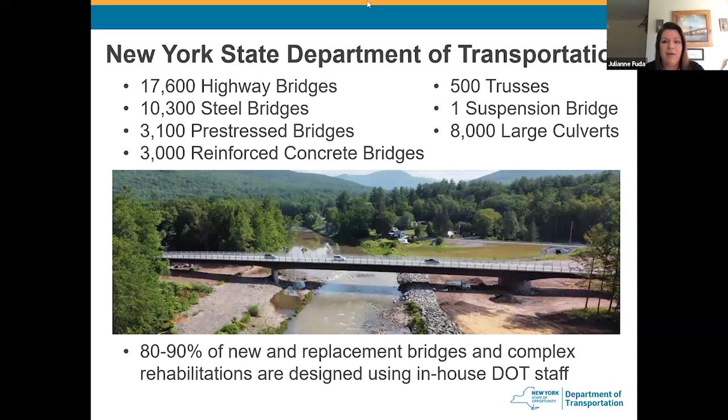One thing that does set us apart from maybe some other state DOTs across the country is that we do 80 to 90% of our new and replacement bridge projects or complex rehabilitations in-house using our own DOT staff. We don't rely on consultants a lot here in New York State, and that's something we pride ourselves in, being an expert owner. I'm happy to be here this afternoon to share that experience with you.

A little throwback to the history of New York State and BrDR. This is a screenshot. We started using AASHTOWare back in 1996. Back then, some more seasoned users may remember it called the Virtis Opus program, where Virtis was used for load rating and Opus for design. We've been heavily involved in using the software since 1996 all the way through currently.

A bit about how we use the software at DOT. BrDR, or AASHTOWare Bridge Rating and Design, is our primary design tool used in-house. It's actually mandated for all new and replacement bridge projects to have a BrDR model as one of the final deliverables at the end of design, whether the design is done in-house by my bureau, by a consultant, or by regional staff.

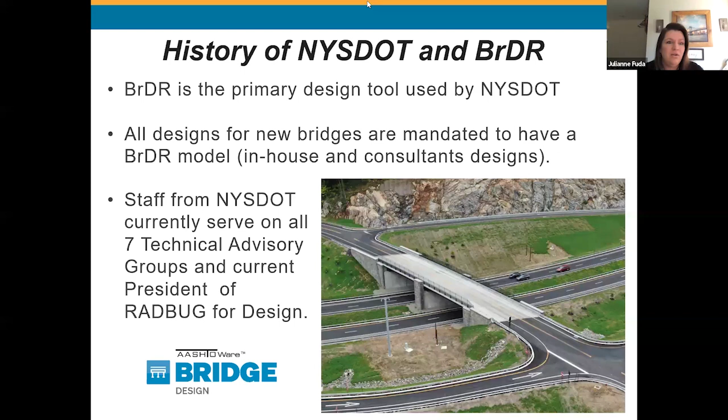Given our deep involvement with the software since the 90s, we have New York State DOT staff who serve on all 7 technical advisory groups, or TAGs. You'll hear me and Joe call them TAGs throughout this webinar. And as Joe mentioned, we are the current president of RADBUG, representing design.

A little bit about how we like to approach our design methodology in New York State. These are snippets from our DOT bridge manual, which is the design guidance we create for engineers across the state on how to approach design of new and replacement projects as well as complex rehabilitations.

From this section, you can see on your screen that it's our standard practice for structural analysis of straight beams or girders to utilize the line girder method. There are situations where a more refined analysis, such as 2D or 3D finite element, might be needed, but we only want that used when specific criteria listed in our bridge manual are met.

The reason is we want our designers using the simplest analysis appropriate for the structure type. So if you have a steel straight multi-girder bridge with low skew and no curvature, that lends itself very well to line girder analysis.

Even though we use line girder analysis in design, we also want it used for load ratings. We have another requirement in our bridge manual that if a more refined analysis isn't required for design, the load rating computation shall be performed using the line girder method, regardless of the methodology used for design. So why do we do that?

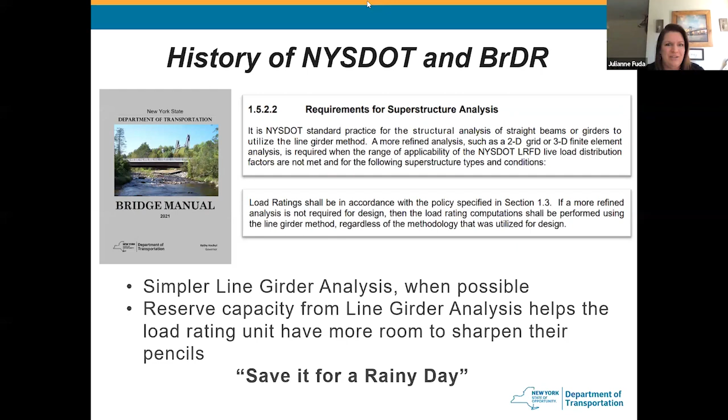The reason is there's reserve capacity inherent in the line girder analysis methodology, and we want to keep that reserve capacity so it can help with load rating and analysis of the structure throughout the rest of its service life. We want to save that extra capacity so we have room to sharpen our pencil down the road and, quote unquote, save it for a rainy day.

We also require that you must use the AASHTOWare BrDR software for design on all new and replacement bridge projects. This is another snapshot from our bridge manual showing how we want to use BRD, the bridge design portion of the software, for design, and BRR, the bridge rating portion, for all our load ratings.

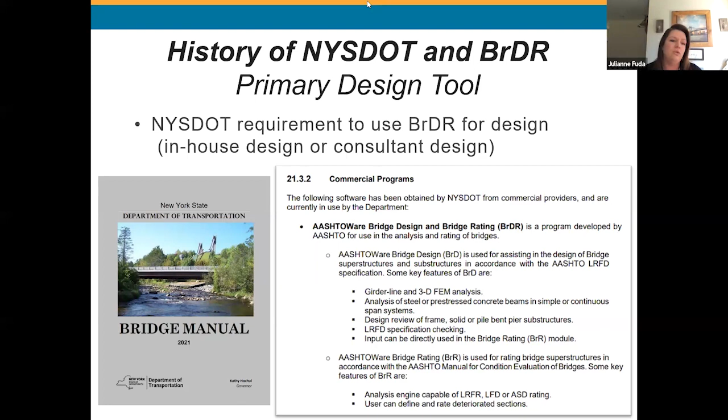And again, this is a requirement whether the designs are done in-house in my group or by the private industry and consultant design.

This is where we get together, we beta test the software. If we have enhancements, maintenance, or bug fixes, all of those are going to be tested thoroughly before it goes out into production. So it's a very valuable involvement.

The design tag as well as the analysis tag, so that's going to be any issues, questions that come up, maintenance items, enhancement ideas, anything relative to those specific topics will be addressed within that tag.

We're also involved in the backlog tag. AASHTOWare went through a major modernization in previous versions, and we kind of had to put some things on hold to make sure that we could get through the modernization before tackling new enhancements or new requests. So the backlog tag has been formed to help us prioritize those initiatives - what is something that is critical that will affect all DOTs, all users, and how can we prioritize ones that are maybe lower on the priority list, and how can we get funding to push those ideas through. So that's another tag that Joe currently sits on and brings a lot of value to our department.

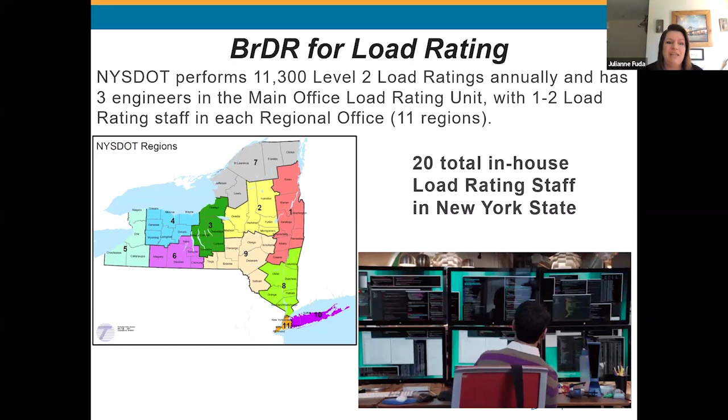So talking more about load rating, we have New York State DOT, we perform 11,300 level 2 load ratings annually. And we do that with 3 staff in our main office load rating unit. And then we have 1 to 2 load rating engineers within each regional office. New York State is broken out into 11 different geographic regions. So we have approximately 20 total load rating staff to complete the 11,000 load ratings each year.

So this cute little video on the screen here shows that it doesn't matter how many monitors you have, that's still a lot of work to get done.

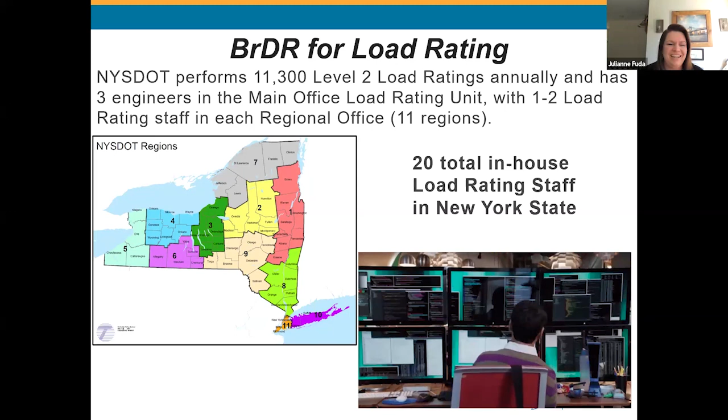All right, let's talk about the life cycle of our BrDR model. And this is really relative to how we do our workflow within New York State DOT. So we start with our design staff. Let's say we're going to have a bridge replacement project. We are going to create a BrDR model for that bridge replacement that reflects the design for that.

At the end of our design project, we are then going to transfer that model to our load rating staff. So we're going to export our XML file, give it to our load rating staff. They can import it into their database, which I'll talk about more in a few minutes here. But then the load rating staff can then use that model for the intermittent load ratings throughout the rest of the bridge's service life. So that work up front has already been done in design, and we can transfer it to the load rating staff for them to use.

But now the great aspect here of this kind of life cycle is, let's go 20, 30 years down the road. Maybe the bridge needs a deck replacement. Maybe the entire corridor, we want to add an extra lane all the way through. So maybe it's a new bridge that was designed 10 years ago, and now we need to do widening, add some girder lines, change our foundations.

We can take that BrDR model that has been used by load rating staff in their database, and we can take that and start it for our bridge rehabilitation model. So we don't need to dig out the record plans and create a model from scratch. We kind of have this living model that's been intact throughout the service life of the structure. And then once we're finished with our bridge rehabilitation project, we're going to update that model for the new designs. And then we're going to export that XML file and give it back to our load rating staff, and they can continue its use throughout the rest of its service life.

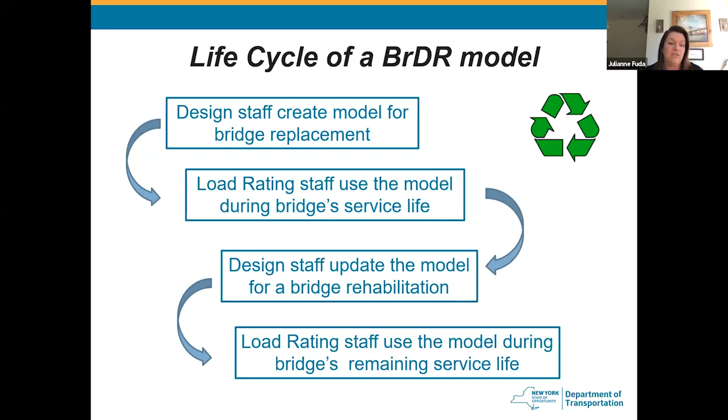So this next graphic I have on the screen here is just a visual component that explains that process. And what I really want to emphasize is, we are all doing so much more with less resources, and we really need to work smarter, not harder.

Why would we recreate these models multiple times as we go from the design to the load rating portion of the structure service life? This is exactly why.

And then after we transfer that to our load rating staff, now biannually at every bridge inspection, every 2 years, we're going to update what we call a level 2 load rating in New York State. So the difference between a level 1 and a level 2 is just regards to the amount of detail and precision that you are using in that load rating.

A level 1 would account for every load, all of the exact capacity, etc. But a level 2, maybe you're only updating the model throughout the service life for things like additional loads. So maybe the county's gone through and added an asphalt wearing surface - that's an additional load that needs to be accounted for in your analysis.

Maybe they've changed the old steel railing detail to a more durable concrete barrier. That's going to weigh more than the initial bridge was designed for with the steel railing. That's something that needs to be accounted for in your analysis.

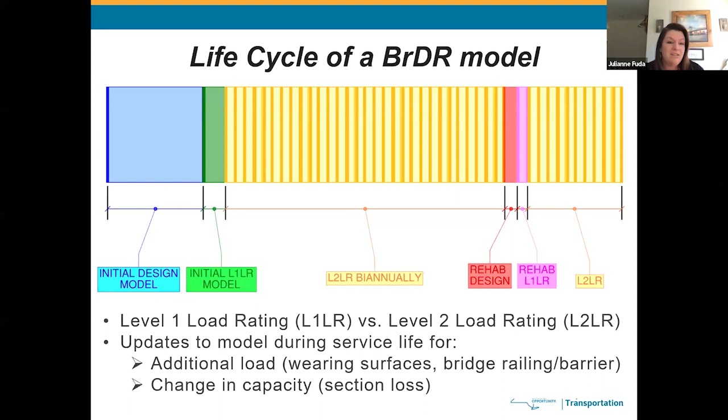Now the data and the users for each of these databases are very different in that our load raters that we talked about earlier, we probably have 20 staff across the entire state. The amount of users are much less than the amount of design users that we have. I have 73 staff in my bureau, and we also have regional structures staff as well as consultants, so we have much more design users than we do load raters.

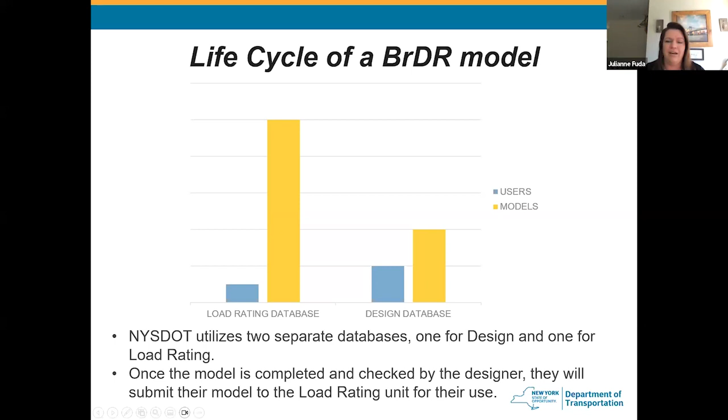However, the amount of data, the amount of BrDR models that the load raters work on, those are going to be all of the structures that we have in New York State - about 17,600 models in our load rating database. We'll have significantly less in our design database because we are not building as many new bridges as we have currently in service.

Next slide, thank you. So I think this is a really good introduction into what we do at New York State DOT and how we use the BrDR software, but I really want to show a couple slides here about how the entire country, how all states are using the software.

You're up to 90% of the states, for example. So what I'm really hoping for our users and our other departments of transportation, state agencies to get out of this webinar today is, I feel like we've done a very good job at using the design and the load rating components of this software.

We'll take questions at the end, but my contact information will be up on the screen. If you ever have questions, I really urge you to reach out, because this is a really great software program that's helped us in New York State. So with that, I'm going to transfer it to Joe so he can walk you through some of the software capabilities.

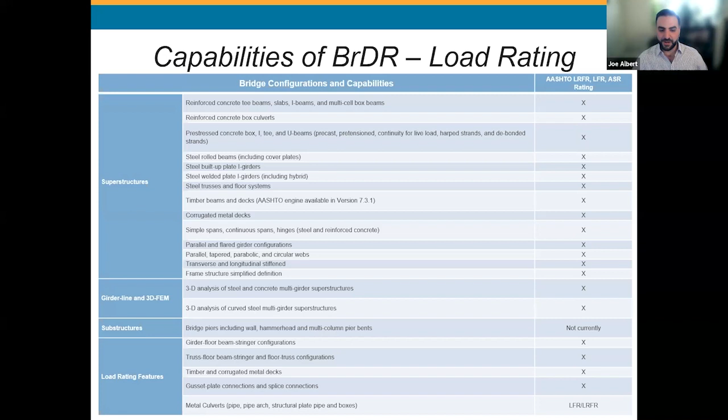Currently, you'll notice in the load rating world, there is not a substructure module right now. We are currently working to refine that. There's also a subcommittee that I'm on for substructures.

And that's really one of the perks of the program — I'll touch on this a little later in the presentation — but just the fact that it's user driven. We go through these mock-ups and we work closely with the developer, and they're fantastic at getting back to us on things, and we'll test these things out, and that helps us develop a confidence in using them going forward.

So really, I encourage you, anytime you're in the program and you see a new report tool, you really should be testing out these new features, and we do beta testing. There's only so much we can do, but once it gets into production, test it out.

And maybe if you think to yourself, hey, I sure would like if this program could do that, then you have that opportunity to bring that to the developer.

So there's some constructability checks that I know I've been lobbying for myself to get, because typically in design, you really don't have a one-stop shop program, and this for us is really the closest thing. So as we do our designs now, AASHTO requires that we make sure the bridge can be built, and we do our own constructability checks.

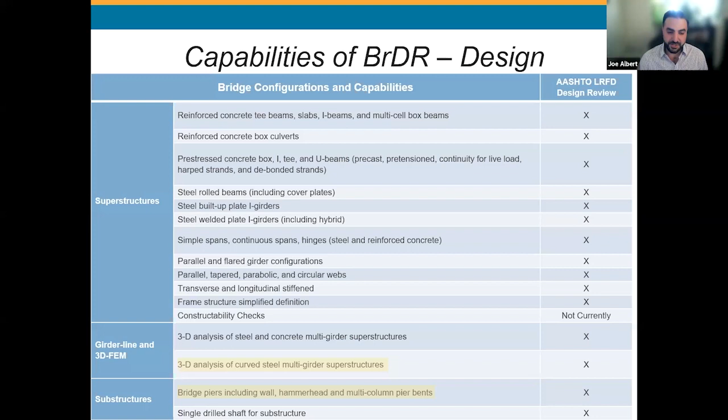So this is just a current list, and we are working on the bridge. It does do LRFD design for substructures, which I'll get into a little bit as well.

So the spec check — this was part of when the program went through its overhaul. I feel that the spec check is one of the greatest things about any design program that you see. It's an LRFD spec check for all 3 stages, whether it's your non-composite stage, your short-term composite, or long-term composite stage. I do want to point out that this program is an AASHTOWare program.

So when the new version of the spec does come out, it is the first, if not one of the first, to include all the updates to the LRFD code within the spec check and within the program as well, which helps you know that you're staying up to date with the code and within compliance of the LRFD design code.

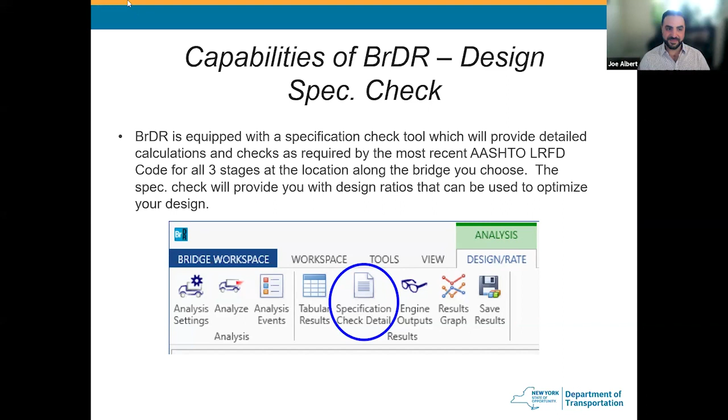So with the spec check, it'll actually show you design ratios, and you can use those design ratios to optimize your design. In the design world, you very rarely pick your first girder size and call it good. You constantly try to refine and make things more efficient, especially with the cost of everything today.

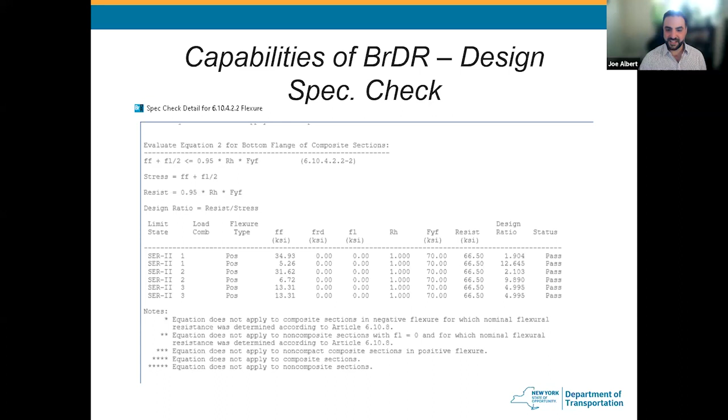And if you care to go and back check that with hand calcs, maybe that'll help you establish a little bit more confidence, which I urge all my designers to do. It's very valuable and it's very clear, and you can always cross-reference it with the code.

There's also the steel design tool, like I brought up before, about picking your first section for your steel, your first girder size, and calling it good. Everybody has their own rules of thumb that is a decent starting point.

Well, with the steel design tool, you can automatically generate girders that are efficient. It doesn't mean that it's going to be your final section, but it's going to get you very, very close. Again, minimizing the amount of effort that you need to put in to do this, minimizing the time that it takes. We all are trying to find more time in the day.

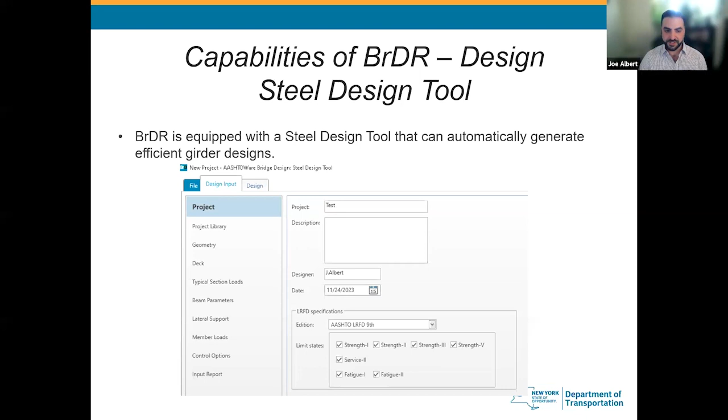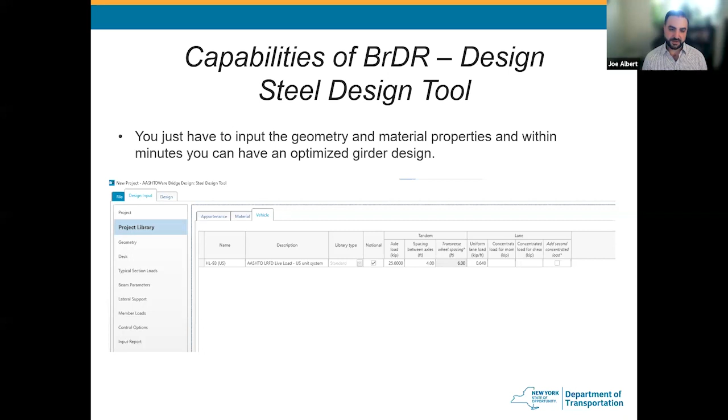So really, you can just input your project, pick your code, input some geometry and material properties, and within minutes it's going to spit out a girder design for you that will also show you what your volume of steel is for estimating purposes, and for trying to figure out which option may be more efficient. It'll give you a little schematic showing you your flange sizes, your web sizes, any kind of flange transitions that it has detailed for you.

Some stiffeners, it'll give you some cross frame spacings. It pretty much spits out an entire superstructure design for you. And this also has a spec check as well.

So if you're interested and you want to dive deep inside, you can check the numbers yourself and see maybe you can economize it a hair more, something for constructability or site condition that may dictate where you can have your flange transition. You can work with that after the fact, but it's a great starting point, and it really spits out a lot of information and a very clear picture for you.

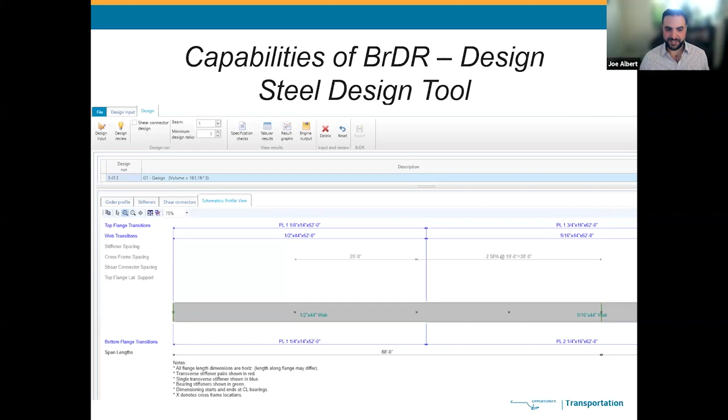So you say, oh, you New Yorkers and your steel, you guys love your steel. I know every state has a different climate, different ways of treating the roads. Maybe concrete is more of your thing. Don't worry, they got you covered.

There's also a pre-stress design tool that you can use, and you can optimize your beam design there. It will give you your strand layouts, beam details, profiles. It'll show you your harp strands and

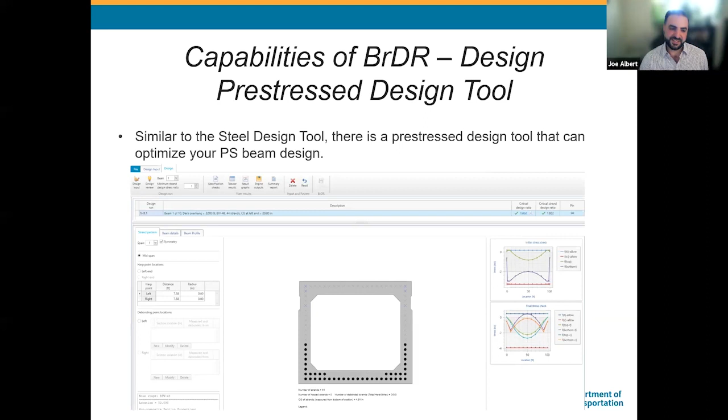where they're debonded zones. It can really, same concept as the steel design, just gets you in a really good spot very quickly. I put these slides for the screenshots together within 10 minutes, and it had me at a nice superstructure layout.

3D FEM, this is finite element analysis. This is something that's come a long way. When I first started with the program back in 2011, it really wasn't a thing, but now the program's come a long way due to a lot of user input. And if you are required to do a 3D finite element analysis, you can do it now.

You just need to change a few things in your supports. There's plenty of training online, training videos that will really walk you through all sorts of different tips and tricks on how to make it efficient. And you can see how your lateral loads now affect, and you can input wind loads, or have the program generate wind loads as per the LRFD code.

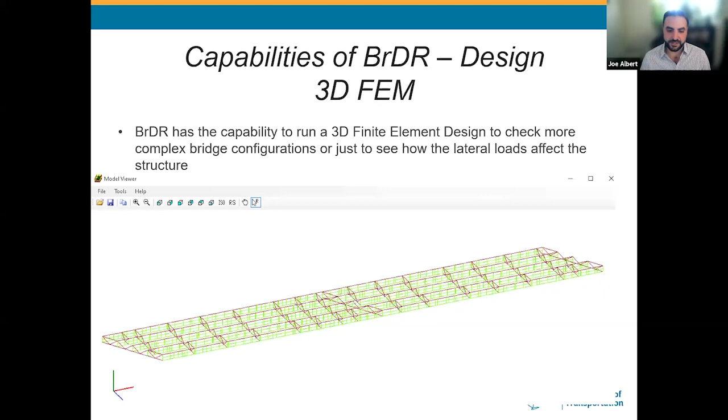It's a shell system, so you can see all the shell elements, and if you want to look at your stress maps, you can take a look at your stress maps. This also works with curved girder structures, not just highly skewed structures. And again, this will also spit out a full spec check at multiple locations.

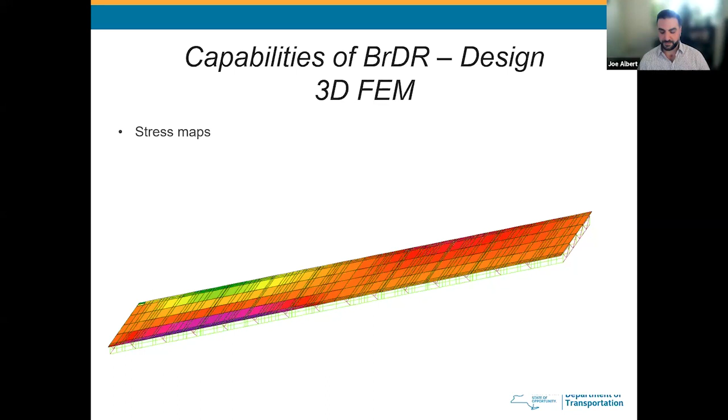So we have come a long way with the program to get it to have all these different superstructure types. Well, you're only as strong as your foundation, so why not add substructures in to try to really make it a one-stop shop?

Currently there are four different types of piers that you can analyze. It has a wizard that will help populate some stuff with a few geometric points. The idea is to eventually be able to go into the bridge model and have the entire bridge model, so you're not pulling your superstructure loads out to go to another program to analyze your substructures. You're going to have it all, you'll minimize human error, you'll have it all in one model. Your superstructure loads will get transferred to your substructure, and you can run designs on all of it.

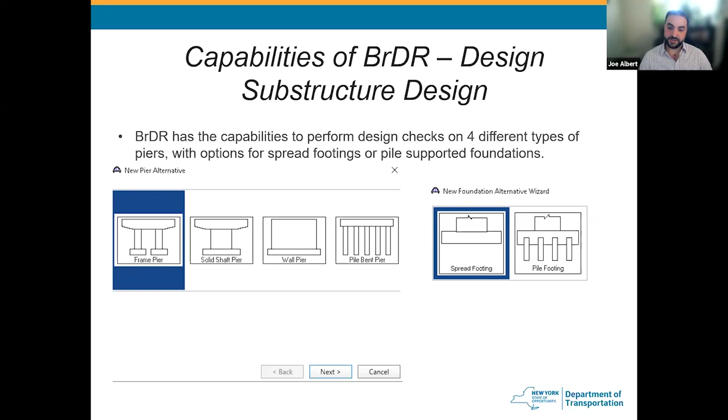So currently you have a frame pier, a solid shaft pier, wall pier, and a pile bent pier. And you can choose to either have it on a spread footing or a pile supported foundation.

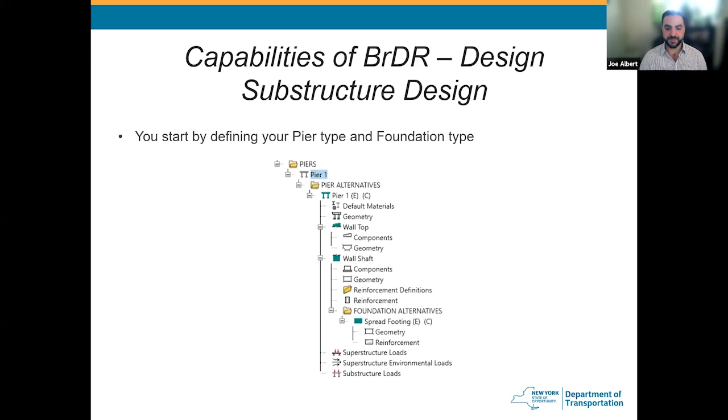So just a quick little walkthrough. You start by defining your pier type and foundation type, and you can see all of the other components that you can put in, your geometry, your materials. You can go through your reinforcement, and then there's your superstructure loads, and then you can also generate ice loads and all the applicable loads per the LRFD code.

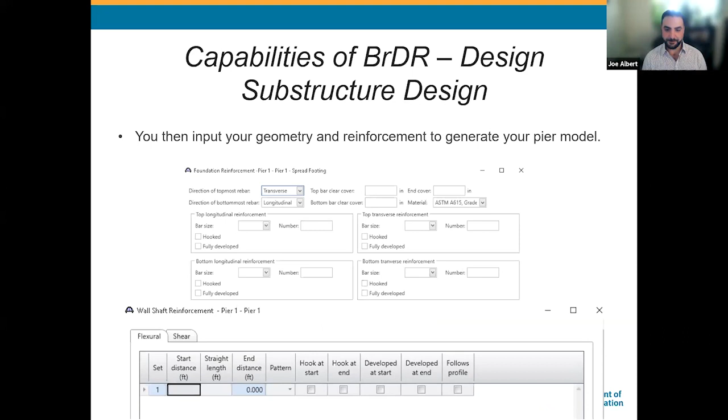And then once you input all of your geometry and reinforcement, it's got everything that you need, whether you want to tell it to hook the bar or not, what size and how many, clear distances, the whole nine. Then you can generate your pier model.

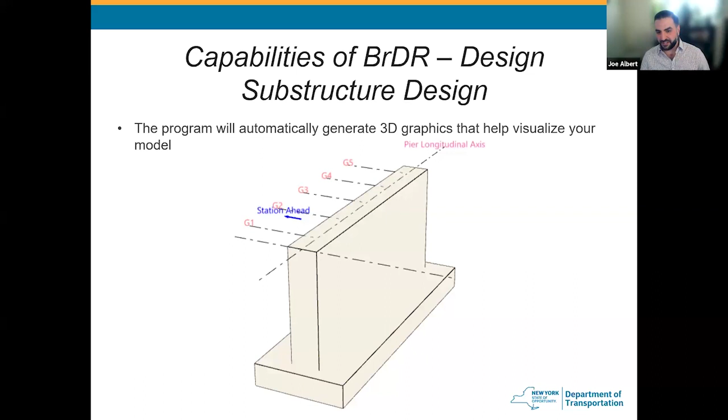What I find very useful when I'm using this are these schematics. It gives you a 3D graphic, and it really helps you visualize your structure. You can really troubleshoot here. Sometimes you might have some fat fingers and press the wrong button, and you're going to see it in the model, and it updates automatically. So as you're punching numbers in on your geometry, you'll see the changes in the 3D graphics.

Similar to the superstructure, if you can't tell, I'm pretty big on my spec check, love the spec check. It also has the spec check for your substructures as well. So if you're interested in a certain location, just pop open the spec check, and you'll see all the applicable LRFD code checks right there in front of your face.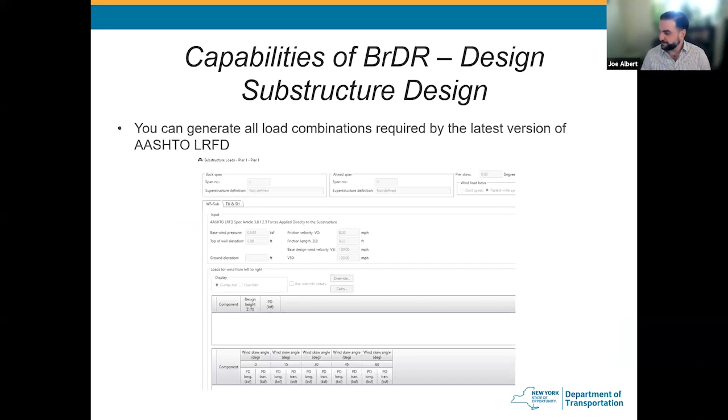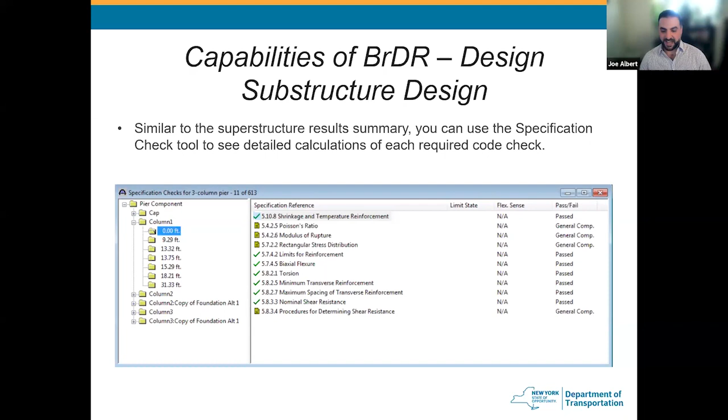And one of the really big benefits is that you can have your entire structure in one model. And with that, I'll let Julianne get into a little bit more of that with the industry, and where we see the industry going in the future, and why this is something that's beneficial, not just right now, but also going forward.

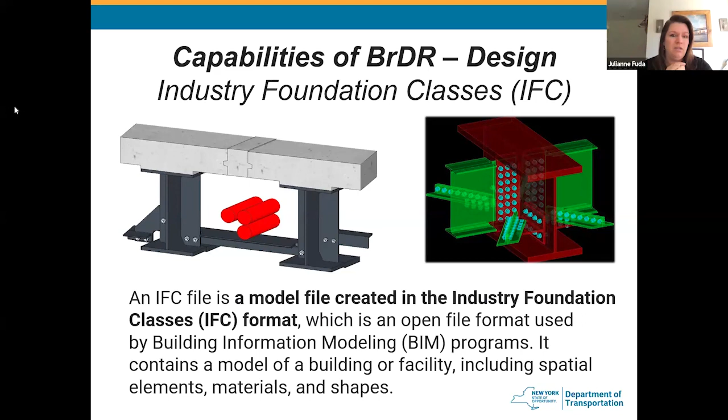I'd really like to talk about one of the more exciting capabilities of this software and how it's related to IFC files. So an IFC is an Industry Foundation Class. The file is basically a model file that can be used. It's an open file format, so it can be used by any BIM program. It contains information about a model, including spatial elements, materials, shapes. It's basically an information model that can be opened in a variety of software programs for a variety of needs.

Currently, AASHTOWare BrDR can export models into the IFC 4.3 format. What that does is allow the design models, whether superstructure, substructure, or both, to be exported into this file format so the design user can import them into different modeling programs. You can generate 3D models of your superstructure and substructure, and put them into a modeling or CAD software to create your contract documents, whether those are 2D plans or 3D contractual models.

You can also use them on the fabrication side. What we need for design, the models and information, are not always exactly what the fabricator needs during construction. With IFC, you can take the pertinent data from the design model and they can import it into their fabrication software to eliminate a lot of that data reentry. We can also use it for construction models, and ultimately the goal is to use it for asset management. So the industry as a whole is really interested in these IFC files and how we can transfer all of this digital information, not only from design to construction, but also into asset management.

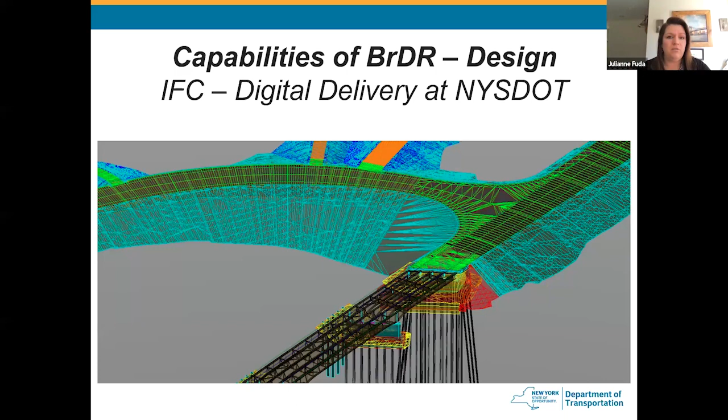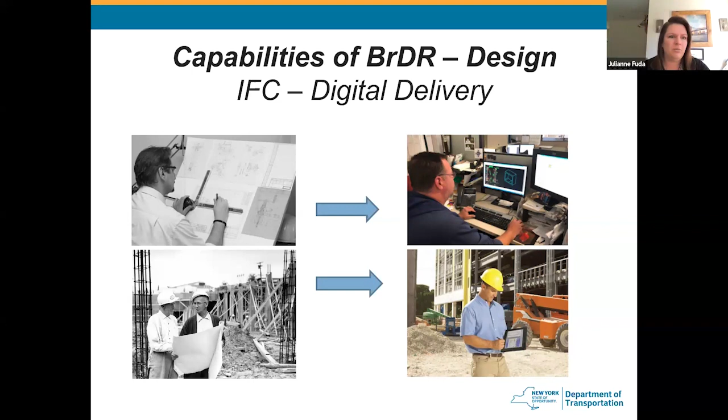Looking at these images, the pictures on the left show how we used to do things 30 years ago, and maybe even as recent as 10 years ago. We used to draft everything by hand. We don't do that anymore. Now we're into our CAD software, in our cubes with our multiple monitors, preparing our contract documents. But even until recently, contractors always wanted their papers in the field, their 11 by 17 plans, their big roll plots, and that's how they built our infrastructure for decades.

But now we're really seeing a shift in the industry. Maybe they're not holding plans in the field anymore, maybe now they're holding tablets. So how can we give them our design information to be able to use electronically in the field?

At New York State DOT, our digital delivery effort means we don't want to be taking these very smart 3D design models or contractual models, where you're in your CAD software taking your design data and modeling it in 3D, and then flattening all of that down to dumb 2D plans. We have all this smart information that we're dumbing down to give to the contractor, while the contractor is utilizing emerging technologies to use that 3D information to build the bridge, to build our structures. So digital delivery cuts out that middle part where we're creating 2D plans, and we want to take the smart information models from design and transfer them directly to the contractor through to construction.

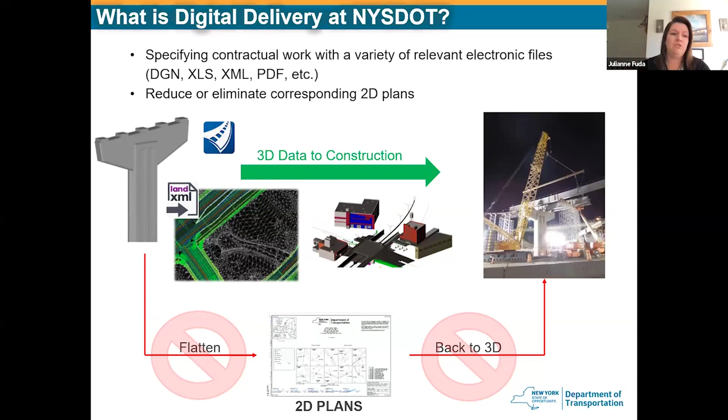So we have completed two pilot projects in New York State. The first is Route 28 over Esopus Creek. This was a very rural environment, a large multi-span bridge, and a great project for us to get our feet wet. We dove headfirst into the deep end on this because we went full model-based contracting, meaning all of the contractual documents were in 3D models. Our superstructure, substructure, foundations, and highway design elements were all provided to the contractor in a 3D model.

Our second pilot project, East 138th Street over the Major Deegan Expressway, is currently in construction. These two projects could not have been more different. The first one is very rural, we had a lot of space to work with. Our second project down in the Bronx is a single span structure, so maybe structurally not as complex, but the rendering on the lower left shows we had a very complicated web of utilities. In the city, they just build and keep building right on top of whatever was there before, so there was a lot we had to coordinate to build this structure.

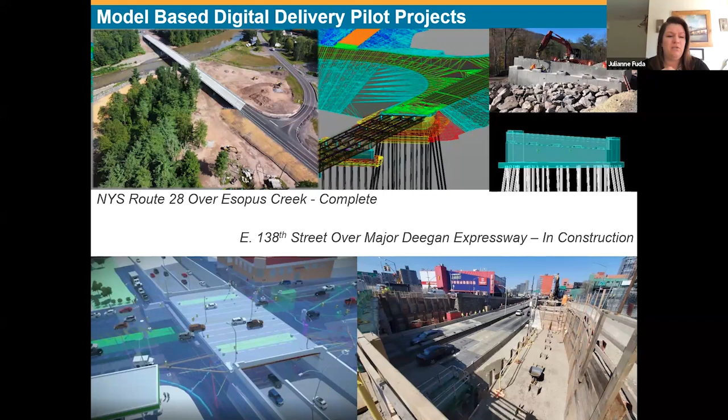3D modeling was really an excellent choice for both of these projects, because not only is this the way the industry is shifting, but this was a way for us to utilize the 3D models from design to construction.

I really want to boast that AASHTOWare BrDR is at the forefront of IFC file compatibility. If you look elsewhere in the industry, other software platforms are just starting to think about it, maybe with IFC file compatibility. But AASHTOWare is actually working towards IFC 4.3.2, which is certified by ISO.

The key with these IFC files is that what I need in design, as Joe was saying, for spec checks and design documentation, is going to be vastly different than what the contractor needs to build the structure, or what the fabricator needs to input into his software to actually fabricate the steel girders, for example.

IFC is really the key, and that's what's going to take our BIM from design to construction and eventually through asset management. Before BIM, we were very siloed in how we did our work. Everyone was independent, and we would do our job and then transfer the key information to the next stakeholder down the road. But with BIM, which is really IFC, we're going to have a whole life cycle of our data instead of being in these silos where we're reproducing work unnecessarily.

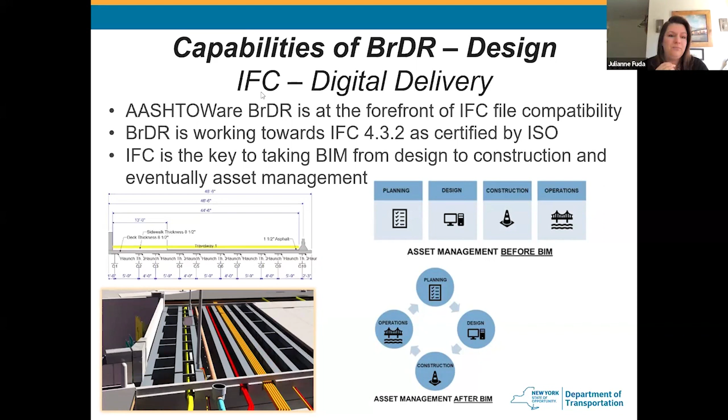Thanks, Julianne. So I kind of touched on it a little bit through my previous slides, but I want to go into a little more detail about how this program really offers a unique user experience.

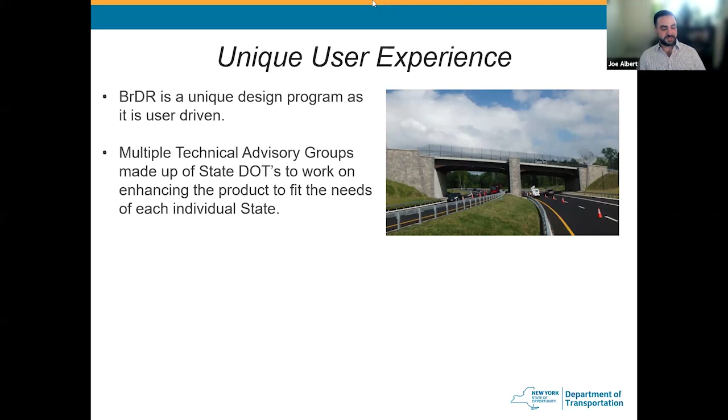It's user driven. We have these technical advisory groups comprised of state DOTs, and there are a couple of consultants as well. We try to work on enhancing the product and getting it to each state-specific needs. At the end of the day, each state is going to be a little different, their needs are going to be different. So it's a good way to hear about what challenges other states are going through, maybe they've solved the problem you're currently going through, and you can expand the program's capabilities.

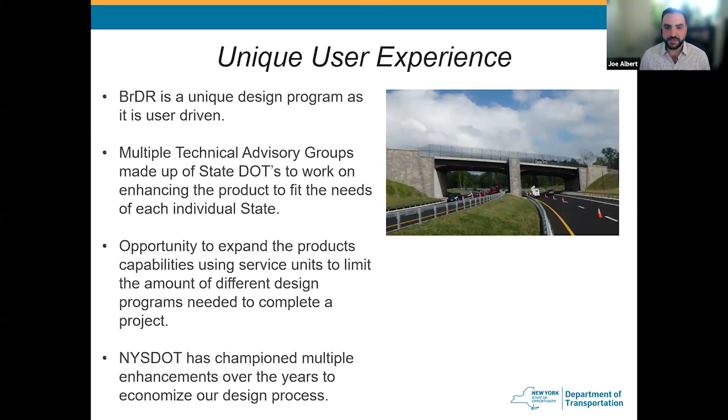I used this analogy at last year's Radbug: you can't go ask Microsoft to bring Clippy back, they're just not going to do it. Whereas when we work with the software developer here, if there's enough states on board that see the program needs to add something beneficial to multiple states, it'll get done. It'll get put into the program, and you'll work with the software developers on how it gets put into the program.

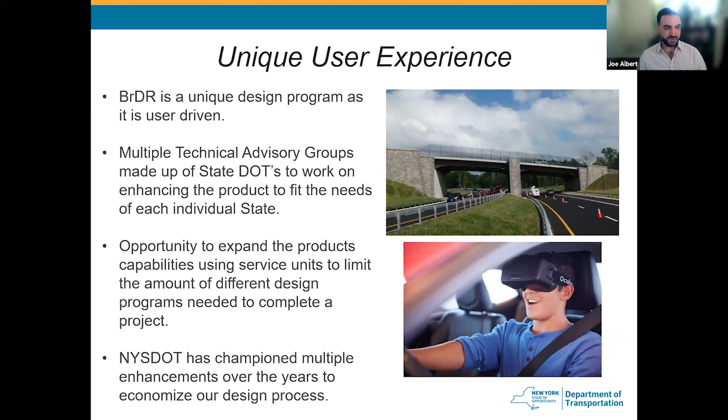I urge other states to take the opportunities to do that as well. I can go into the enhancements in a little bit more detail.

So, service units. Being that it is user driven, you can purchase service units with the program license, and that's kind of how you can start to customize, have the program customized to what you really need. The service units can be used for enhancements, custom additions into the program that you may find that you need, or just training.

We've had a huge influx of young staff coming in on the design side, and they need a lot of training, and there's not a lot of senior level staff - there's only so many hours in the day that senior level staff can train. So we use some of our service units to set up training classes directly from the vendor, and we were able to save ourselves a little bit of time and train a lot of our newer employees.

So you have an idea, right? You want the program to do something specific that's been giving you a headache for years. So you have options. You can either fund it with your own service units. Now, I want to point out the service units roll over year by year. So one of our strategies in New York is we will buy service units yearly, let them stack up a little bit so that we can go after something large, a larger enhancement that really would help us out.

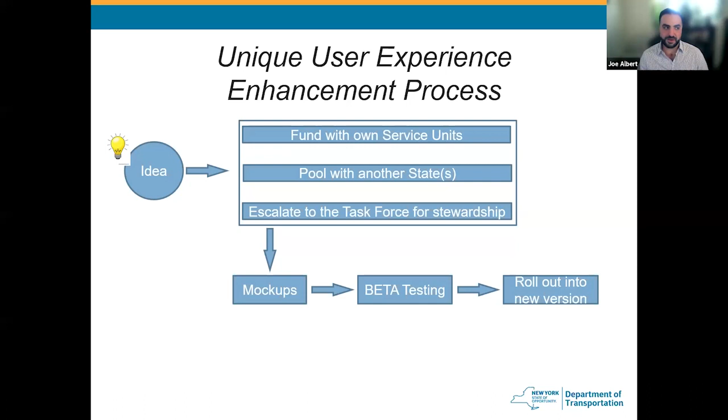So one enhancement that we just went through that you'll notice is in 7.5 is the flange lateral bending tab that's under your lateral support.

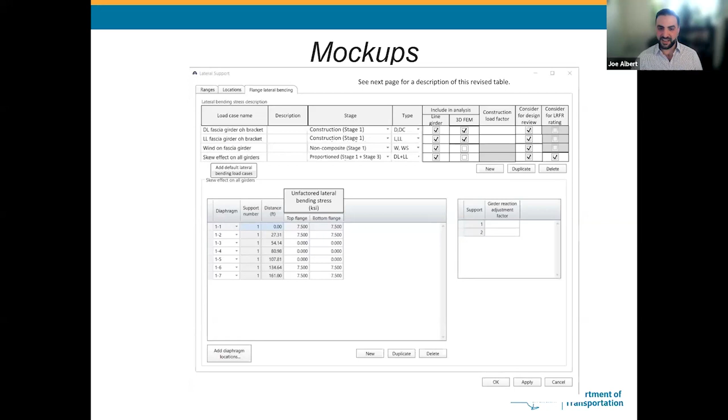And at the end of the day, there it is. It's actually working buttons, and it's not looking like a complete ransom note. So with this enhancement, we did work hard on it internally, but we've kind of started our constructability checks.

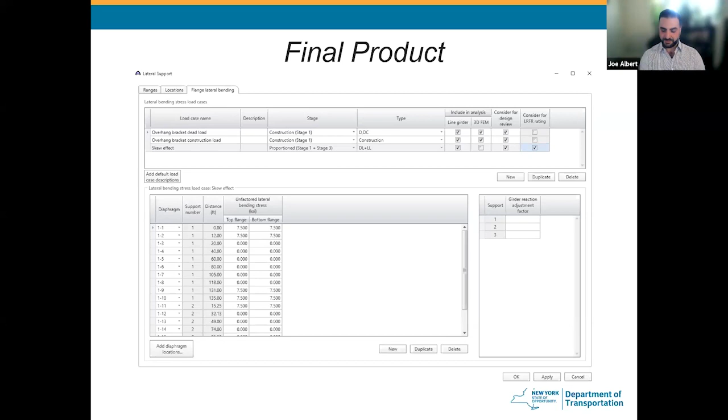As you can see, we've created a construction stage where we can input some lateral bending into our flanges, and check the bridge before it's in its completed phase, and everything follows the code. You have different options on how you want to toggle it on and off. All of this information is in the spec check, and in the help menu if you hit F1 under this tab. So it's not just one little tab here, it was a full-blown effort. You're getting it in your spec check, your help tab, and your end results. So just a quick example of an enhancement that we championed and went through.

So speaking of that, I'm going to harp on Radbug again. August 6th and 7th, mark your calendars, try to get on and register. It's a good opportunity to network with other state DOTs. You can work on teaming up with other states to champion some enhancements, make the program a little more custom to what you want. You can get involved in tags. I highly encourage it. It's worked well for New York State DOT over the years to really be involved in these things, and really helps facilitate our needs. It's a win-win at the end of the day.

The vendor will hold some training sessions as well. If you're feeling up to it, August is pretty nice in Buffalo. I know everybody just thinks of the 6 feet of snow they just got a couple months ago, but it is beautiful in the summer, and you can take a ride on the Maid of the Mist, a little boat that'll take you to the base of Niagara Falls. Highly encourage people to register for that. It's looking like it's going to be a good turnout. Thank you very much.